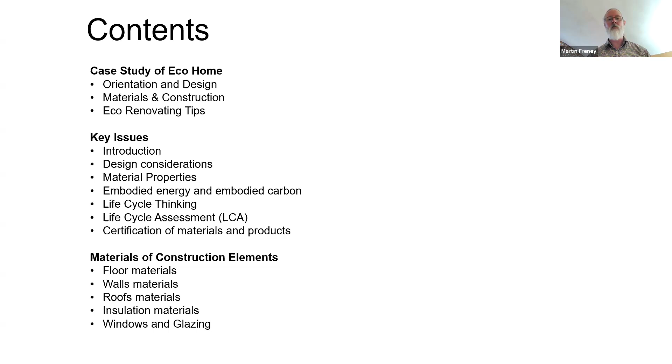So let me start by talking a little bit about design. What will we build and how will we build it? It all starts, of course, with the design team, which is generally you, the homeowner, working with designers or architects. Also engineers often get involved. These are all the people who are making really important decisions about design, and as part of that is, of course, the materials that are used to bring the design to life.

And we're going to comply with the National Construction Code. But I want to just point out that the construction code sets a minimum standard. And so I'm always trying to exceed the minimum standard where possible, with budget and other constraints like that. So at this design stage, materials and costs are locked in. And so this is just such a critical stage. It really sets the tone for the whole project.

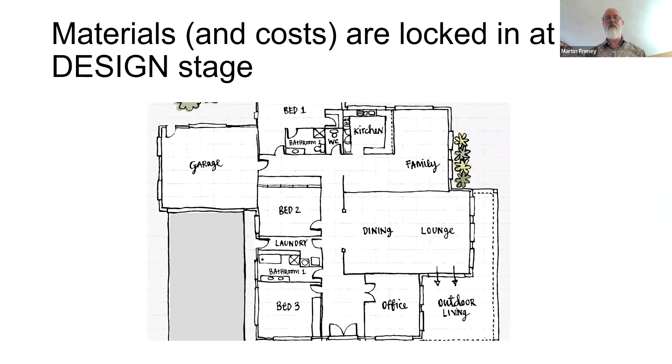And over the life of that home, that is going to be a really big deal, whether it's a comfortable home to live in or not. And running costs and all that kind of thing are going to be baked in at that design stage.

So one of the main considerations I want everyone to consider is the size of their home. This determines how much or how many materials are needed and have to be paid for by the owner, assembled by the builder, and then maintained by the owner. So if you can build small, that is a good thing.

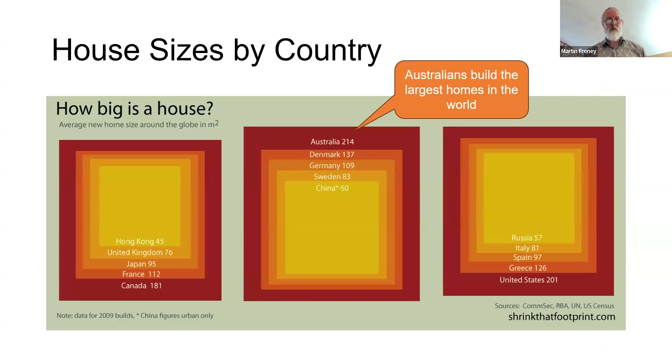And the problem with that is that big houses need more energy to heat and cool. And as I've also just explained, they need more materials. So that has a greater impact on the environment and your hip pocket.

So I'd like to now look at a case study of a home that was completed a couple of years ago now. All the work I do is inspired by the Earthship concept, which is trying to be super sustainable. It uses passive solar design and self-sufficient off-grid systems to make the building autonomous or self-sufficient. The idea there being that you don't have utility bills, and also it's minimizing the impact on the environment.

So what I'm about to show you is of a modest size. It's about 130 meters squared, 2-bedroom, 1 bath on a suburban block of land, reasonably good size, 900 square meters, and it cost about $400,000, which included batteries, panels, rainwater tanks, grey water system, and it was built by an owner builder. It's called Earthship Gulwa.

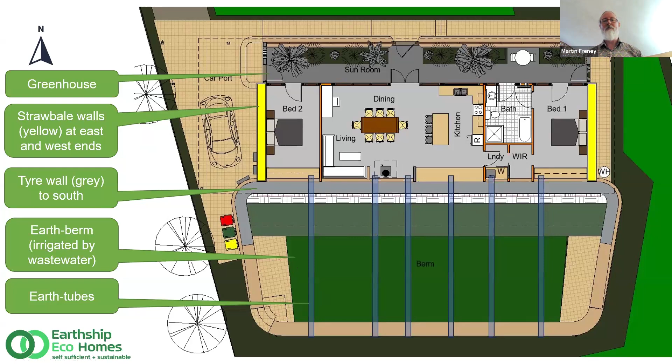So we call that a convection current, or it's sort of like a thermosiphon kind of thing where hot air rises and pulls the air in without needing fans or anything.

The other interesting thing about having a sunroom on the north side of the building is it creates a buffer zone, so that isolates the living spaces from extreme outdoor temperatures. And then the earth berm is also a buffer zone. The highly insulated roof is a buffer zone. So you can see that those living spaces are really isolated from what's going on outside.

So that's the concept. This is a shot taken with my smartphone using an app called Sun Seeker. Shows you the path of the sun. So this is also a really useful design tool.

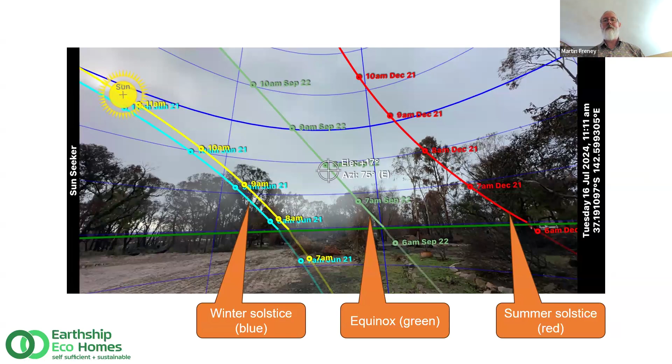I think when you're starting to think about a block of land, you can start to evaluate where the sun is and whether it's going to be blocked by other buildings or trees. So, yeah, this is one of the things that your designer will do is look at where the summer equinox and winter solstice sun will come into the building. And of course, that all works a lot better if the building's facing north.

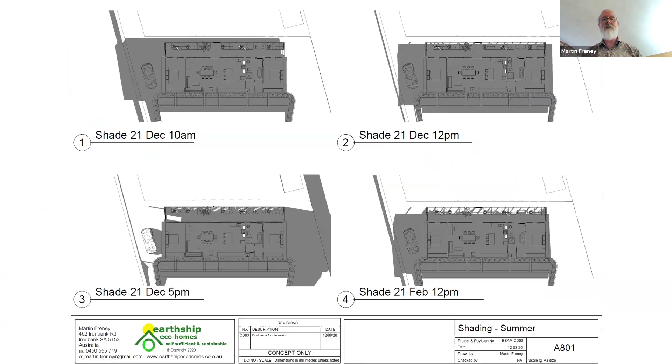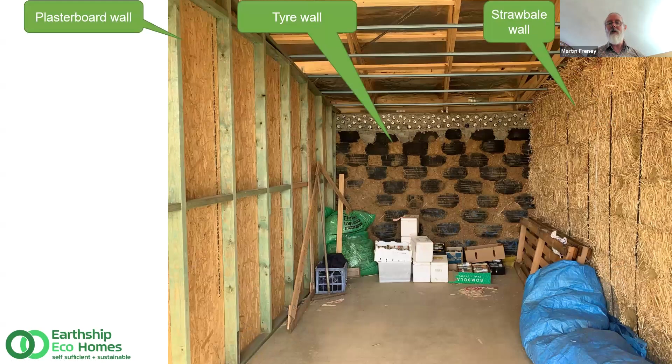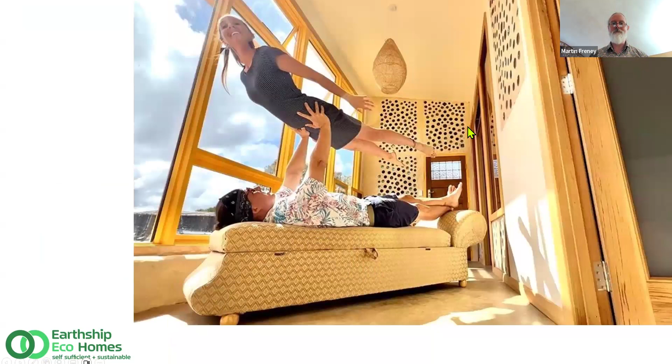The other thing we do with earthships is we upcycle bottles into colourful bricks, which you'll see in that photo as well. So there's some YouTube clips if you want to do more research on that.

There's another earthship project in Victoria. I just thought I'd throw in a floor plan and photo of it under construction, because this is in Victoria, where you're listening from tonight.

All right, so moving on from the case study, I just want to share a few retrofit ideas before I do a bit of a dive into all these material properties and what makes a material ecological or sustainable. So the first thing to note is that upgrading a poorly performing home can be a very sustainable thing to do rather than knocking it over and starting again.

Some of the low-hanging fruit, the easy things to do, are things like draft sealing, as you can see in this photo. For probably under $100, you can dramatically improve the thermal efficiency of your home just by stopping the drafts.

Adding ceiling insulation is another obvious one. Double glazing, or there's a product called magnetite, where another pane of glass or perspex magnets onto a frame to turn a single glazed window into a double glazed window. Ceiling fans are a great idea, and things like solar panels are also really good, especially when used to power air conditioning.

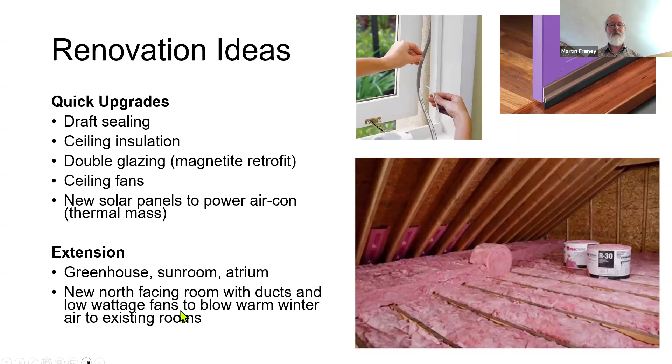A more substantial upgrade might be an extension to the house - so a greenhouse, sunroom, or atrium, as I've just shown you with that Earthship example. I think they're a fantastic idea, just capturing that free energy from the sun, and then perhaps using some ducts and low wattage fans to blow warm winter air into existing rooms.

So here's a few examples of some beautiful sunrooms. This again is one of my designs from the Narara Eco Village in New South Wales. That greenhouse on the north side also provides some other functions like laundry and garden area.

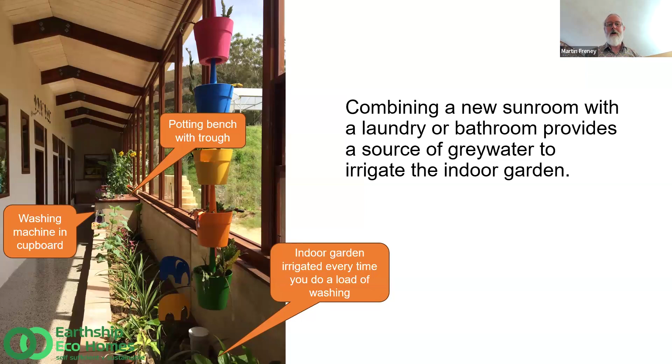Another thing I think is worth mentioning really quickly is some sustainable products. We're sort of in this grey area of products and materials. I'm going to talk a lot about windows later, which arguably are a product, but I just thought I'd quickly mention that.

Composting toilets I feel are really an excellent sustainable choice. Solar hot water services or heat pump hot water services are going to save you a lot of money and electricity or gas, so they're good for the environment and your hip pocket. Solar panels and batteries, same - they save the environment and your hip pocket, and also grey water systems are going to help you save water. The tip here is that if you can think about this at the design stage and not do them as add-ons and integrate them into the design, that's going to work better.

So just a couple of photos of some composting toilets. There's basically two main types - one that goes under the floor on the left, and then the one on the right is much easier to retrofit in because it just sits on the floor. You don't need an underfloor space.

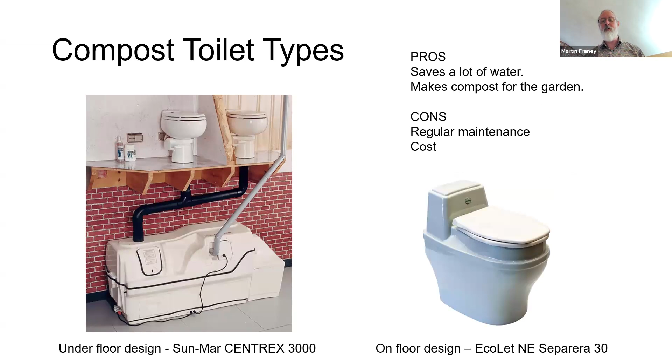As I said, it saves you a lot of water. It also makes compost for the garden. The downside is the maintenance and the cost of these things, but I'm a huge advocate of these. I have one myself and I love it. My kids love it. So yeah, I think they're great.

Or the other really energy efficient option is the heat pump. They come in a split system or a combined unit, and these are very popular these days, saving people a lot of money and reducing pollution.

So on to sustainable material properties. What makes a material sustainable? When choosing materials, there's quite a few things that need to be on your mind. Energy issues - I've sort of been talking about this already. We talk about embodied energy, which is the energy used to make the material, and also the operational energy, which is the heating and cooling energy of the home. That all stems from these material choices. Insulative value, for example, is important - I'll go into that in some more detail in a minute.

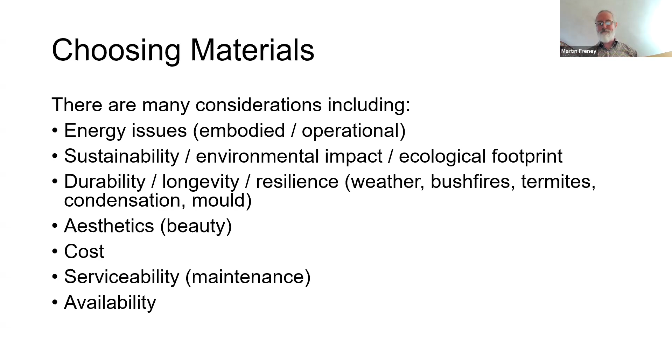The sustainability, environmental impact or ecological footprint is closely related to that first one. The durability, longevity, resilience against things like bushfires, extreme weather, termites, condensation and mold is important too. Aesthetics and beauty, which is of course subjective - you've got to ask yourself what do you find beautiful to look at. Cost, maintenance, and availability are all factors.

What are we trying to do here? We're trying to reduce the eco impacts of manufacture, make the home more energy efficient. We're trying to make sure that the people building your home are not going to be poisoned, and likewise when you're living in the home there's not going to be toxic off-gassing. It's got to be not too expensive and not require a lot of maintenance, and also not cause problems during demolition. This is one that often gets overlooked - people aren't able to think that far ahead.

Let's look at thermal performance - this is the heating and cooling energy, and it's a big deal. It's going to be the biggest cost of running your home, how much it costs to heat and cool it. It's possible to get this right down to pretty much zero with good design. Insulation and thermal mass are the two types of materials that designers use to try to keep that heating and cooling energy down and naturally create this beautiful indoor temperature.

What you see on the right here is a screenshot from yourhome.gov.au - there's a link there, just Google 'your home' and this should come up. There's a heading, passive design, and it talks about design for climate, with lots of good advice about how to actually design for your climate.

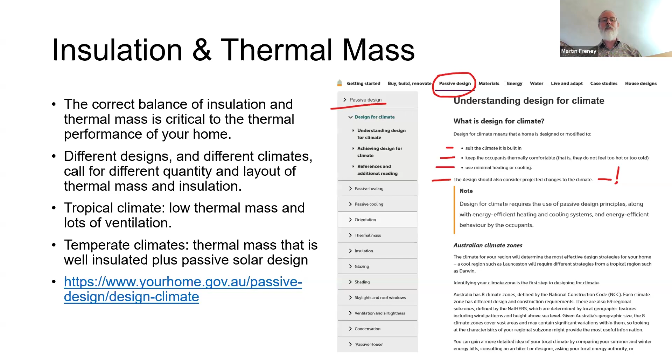What's the right amount of insulation and thermal mass? For example, in the tropics you're probably not going to want a lot of thermal mass because that just holds onto the heat and keeps it warm overnight when you don't want it to be - lots of ventilation is the key in the tropics. Whereas in temperate climates, thermal mass that's well insulated plus passive solar design is going to lead to a very energy efficient home.

So let's talk about insulation. Insulation slows down the flow of heat energy. Keep in mind that heat flows from hot places to cold places, and it's measured with R value and U value.

So there's lots of types of insulation. We've got the batt insulation we were just looking at, which comes in batts or rolls. That's a blanket, typically used for roofs, sometimes it's got the shiny foil on one side.

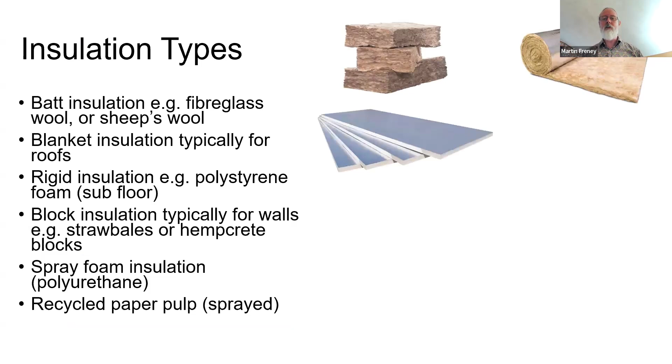Rigid insulation, polystyrene, is often used under a floor. Block insulation—we've already talked about straw bales, but here you also see some hempcrete blocks. And then there's spray foam insulation and recycled paper pulp, which I think is also an excellent sustainable choice because we're using recycled paper.

So, R values. This table shows various insulative products and different thicknesses of those products, and the resulting R value. One thing to notice is where we've got double the thickness, 50 mil versus 25 mil—if we pick this first one, 0.71, and double that, you get 1.42. So double the thickness gives you double the R value.

Another important thing to understand is if you do 1 divided by the R value, you'll get the U value, and vice versa. So it's just the inverse of each other.

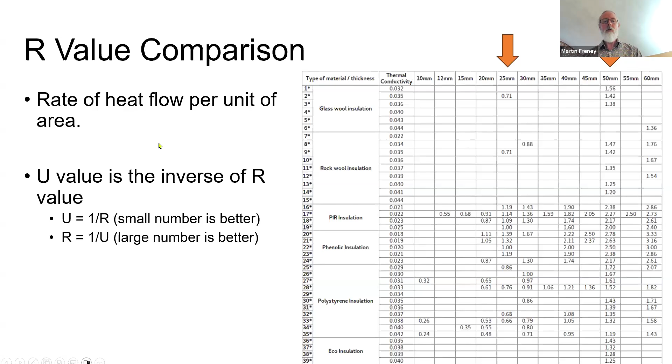Another thing to keep in mind when you're hunting around on the internet is that the units used in America are about 5.7 times larger. So it gets quite confusing when you're looking at American websites.

Another really important thing about insulation is how it gets installed. This applies more so to those batts—no gaps is really important, and also not crushing it, because if that insulation batt is crushed, there's not as much air in it, and it's the trapped air that helps stop that heat flow moving as quickly. That could be an advantage of things like blown-in recycled paper, cellulose, or spray foam, although I don't love spray foam because of the toxic chemicals.

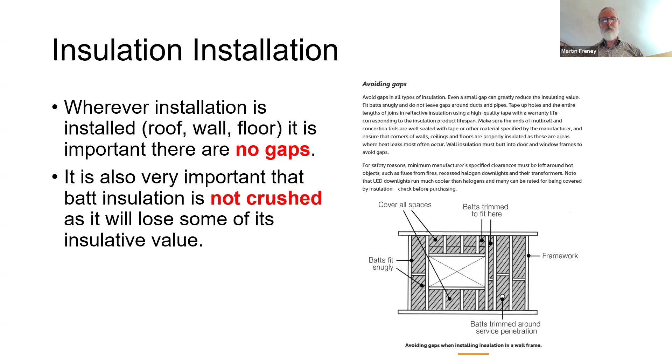So again, I refer you back to Your Home, where you can find some key points about insulation.

Now I want to talk about thermal mass. Thermal mass acts like a battery to absorb, store, and release heat, usually at nighttime when the sun's gone down and you want some extra heat. It helps regulate indoor temperature by what they call a thermal flywheel effect.

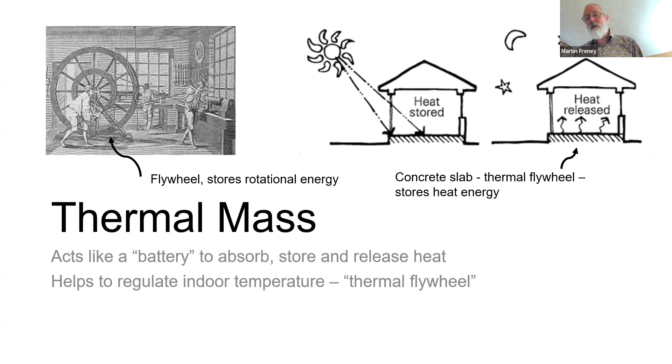So here is an actual flywheel that stores rotational energy. It's a big wheel that once you get it going, it just wants to keep spinning, and here it's being used to drive an ancient lathe for wood turning. It's a similar kind of concept, this thermal flywheel, which stores heat energy.

This concrete slab in this example stores energy from the sun during the daytime, and then at nighttime that heat gets released and helps improve the indoor temperature without active heating.

There's all sorts of types of thermal mass. Concrete is probably the one we're most familiar with, but fired clay bricks are thermal mass, mud bricks, rammed earth, and even water is thermal mass. It's dense materials, whereas insulation is like light, fluffy, airy materials.

This is a photo of the building I'm standing in right now—this is my earthship project. Here you can see a floor made out of earth, which is soaking up the sun and storing that energy until nighttime.

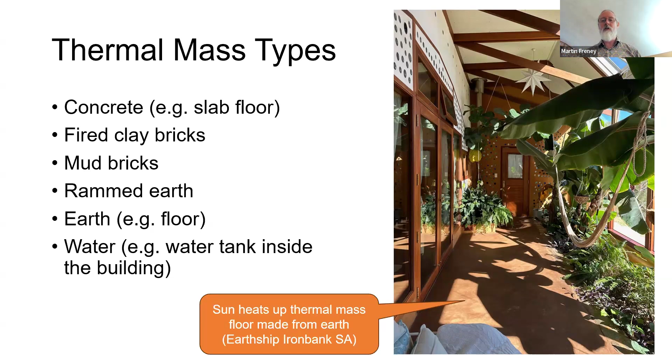Again, back to the Your Home website, there's lots of good information about thermal mass there as well. What works really well is insulated thermal mass in a temperate climate.

This cross-section shows a reverse brick veneer wall, which is where instead of putting the bricks on the outside of the building, we pop them on the inside. Now we've got insulation to the outside, which is stopping that heat flow through the bricks and into the outside air. So just by swapping those two materials around, we get dramatically different results for heating and cooling energy. This is a really obvious and simple way, using commonly available materials, to improve the performance of a home.

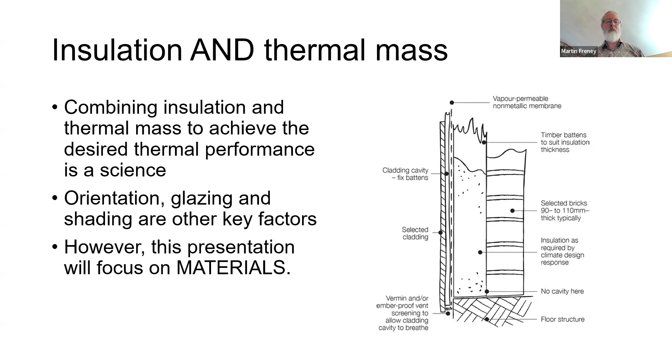So let me move on now to eco impacts of materials and how to reduce your eco footprint throughout the whole life cycle, from manufacture to end of life. It's really important to think about this idea of a life cycle of a home.

As I said before, we've figured out how to make buildings more energy efficient, reducing the operational energy—the heating and cooling energy. The next big challenge for all the designers out there, and for you, is to figure out how to reduce the embodied energy of the construction materials and improve end-of-life outcomes, hopefully recycling instead of demolishing things and sending it all off to the landfill.

This is known as a circular economy—this idea of upcycling materials in continuous loops. So instead of sending things to the dump, they get used again and again.

And that leads into this idea of life cycle thinking. I've listed the four main stages: raw materials getting turned into building products through a manufacturing process, then getting used during the occupancy stage of the building. And then ultimately, every building is going to get knocked over one day, so we need to think about that as well.

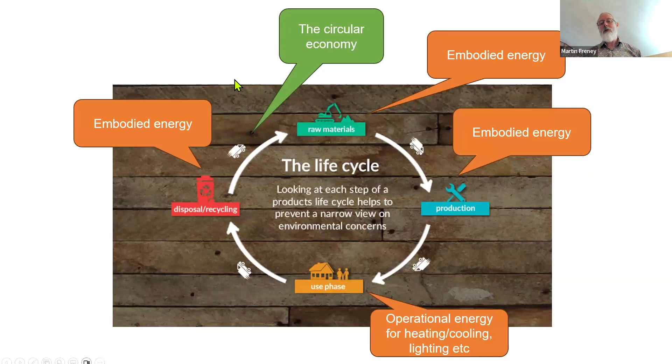Here's a little diagram that shows those four stages. The first two are characterized by a lot of embodied energy. The use phase is all about reducing the operational energy. And in that final stage, there's also embodied energy with carting all this stuff off to the dump or processing it. The circular economy is where it all just goes around nicely in a circle, and we're not having to do as much mining or forestry to get the materials we need to build our homes. And yes, there's also transport energy - you can see a little truck whizzing around, lots and lots of energy moving materials around.

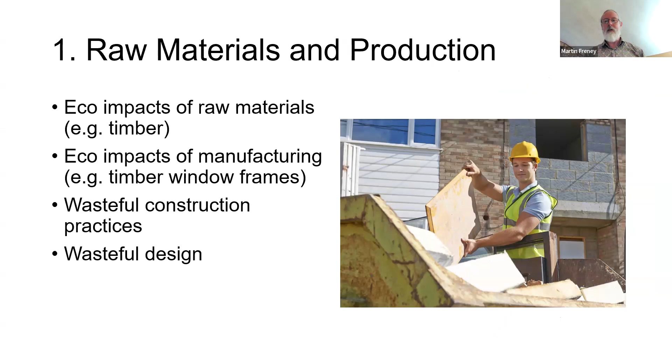So number one, what can we do to reduce the eco impacts? Basically, there can be a lot of waste in our construction practices, so that's one thing. I'm going to go through a case study which explains this in some detail. Number two, I'll just give you a quick overview here.

This is running costs: electricity, gas, water, sewage, and maintenance. Three, end of life - yeah, this is not a good result here, just knocking things down and making a whole bunch of rubble.

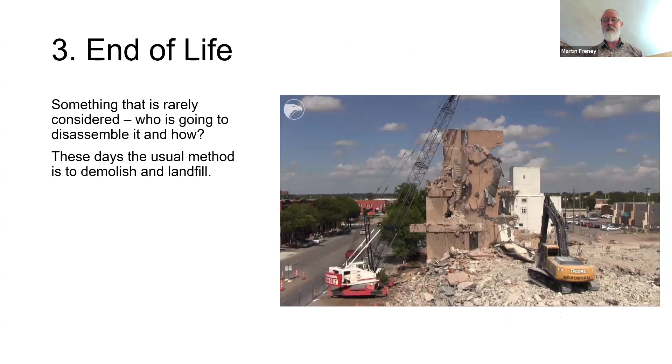So let's look at a case study of the life cycle of timber. I want you to, after this presentation, think about some other material and see if you think you can imagine how all these things are made. But obviously, I suppose with timber, it starts with a tree.

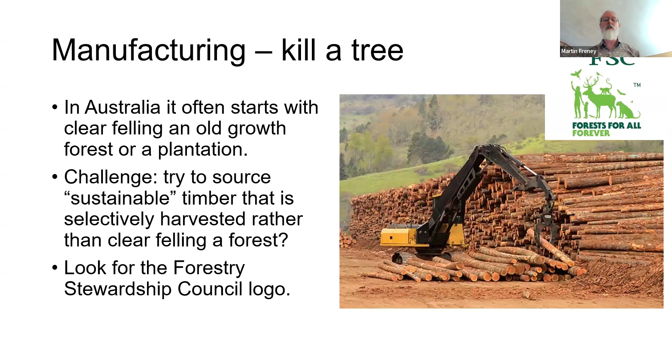And we kind of need all these things to get the tree to grow, and then we have to harvest the tree. It can be a real challenge to actually find sustainable timber that's harvested in a way that's not just clear felling forests, especially our old growth forests. So look for this Forestry Stewardship Council logo, and that's a good indication that more sustainable practices are being used rather than clear felling old growth forests.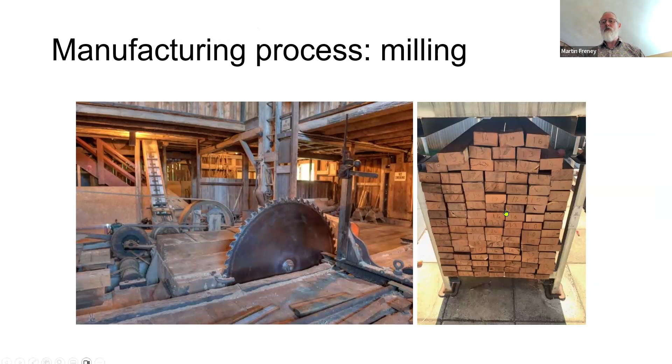It's got to be kiln dried, which is super energy intensive. Perhaps a more ecological way is just using air, but then the downside there would be it takes longer. And another ecological idea that again maybe speeds things up a little bit, but not as fast as the kiln drying and not as readily available.

There's also even energy used while it's just sitting in the warehouse, and of course the materials, the transport emissions to get it to your site. Although if you look carefully, this is a 100% electric truck, so help is on the way.

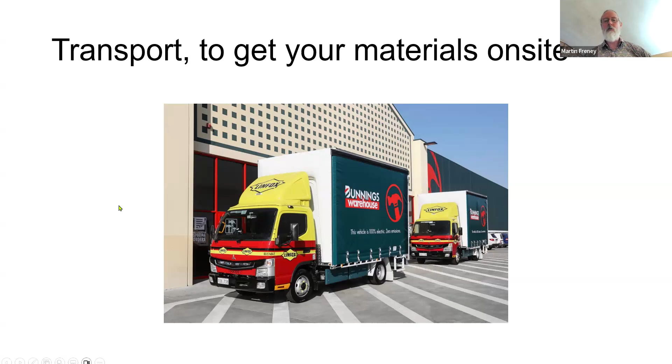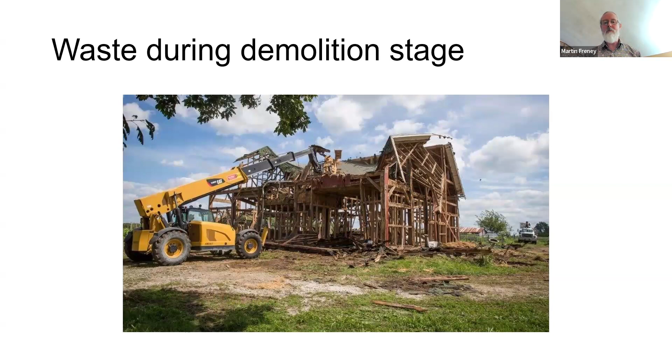And at the building's end of life, what happens to all that timber? Is it going to get put in the landfill, where it could potentially create methane emissions, which is terrible for global warming, and incineration is not much better. So perhaps a better way is, can we design timber buildings?

Here you see a beautiful timber building that is actually designed for disassembly and reuse in another building. So this is kind of the future.

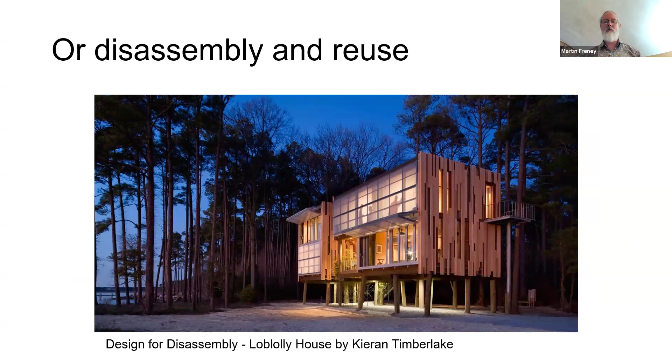So in summary, throughout the life cycle of timber-based materials, there are lots of opportunities where we can make better outcomes. And it's by considering all these life cycle stages, looking for FSC certified products, avoiding waste on site, specifying eco-finishing and maintenance products, and designing for disassembly, that this can all lead to much better outcomes when we're talking about timber.

And so, of course, I don't have time tonight to go through a whole lot of other life cycles of other materials, but your homework is to just put your thinking cap on and think, well, how is something produced, and what might happen to it at end of life?

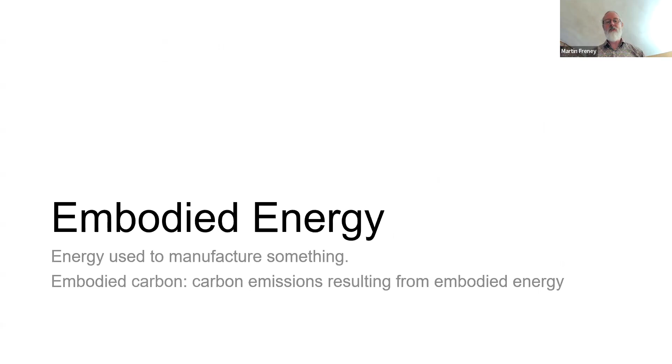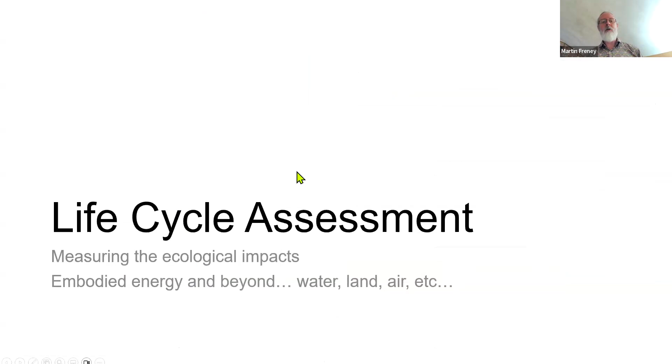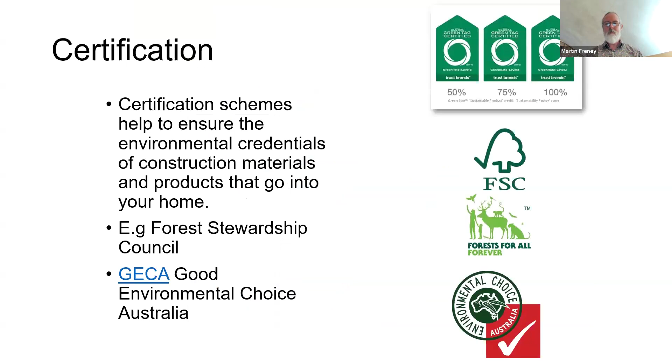This now gets used for certifying products. You can see here at the heart of the Global Green Tag rating system, life cycle assessment is used to evaluate how green a product or material is. You can do a search - I searched for insulation, and it provides examples of products that have gone through this system and been shown to be more green than comparable products. There are a few certification labels.

So, Martin, yeah. G'day, Martin. I've got a couple of questions, if you don't mind. Maybe I'll just throw a few in now, if that's okay.

The first question is, are all double glazed windows still imported, and if so from which countries, and are they transported by air? Do you know much about double glazed - I'm guessing that means the glazing units, because people make double glazed windows locally, the actual window frames, but are the double glazed units that go into those windows imported? I'm pretty sure we have a local manufacturer - Viridian, I believe, is an Australian manufacturer, they get made locally, but I'm not 100% sure. I have got some slides coming up on double glazing.

Great, thank you. Any other questions? Yeah, one more. Is there any progress with testing of houses for energy efficiency before completion certificate?

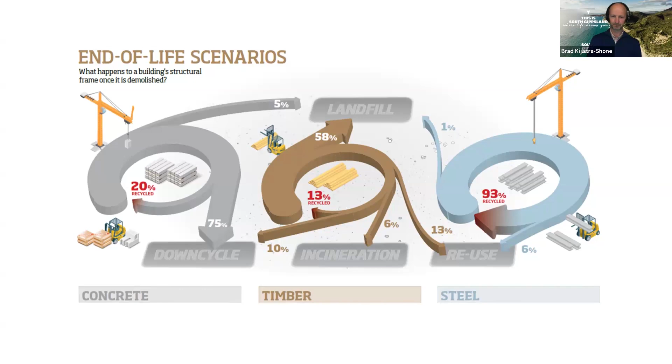Yeah, I think it's a great question, and I would love to see more testing of as-built homes. At the moment the system we have is that you get your energy assessment done at the design stage to show the house is predicted to meet the minimum 6 or 7-star rating. But that's a prediction using software and a lot of assumptions. Another confounding factor is how one family might use the home versus another - one family might be really good at opening and closing windows, turning off lights and heaters, whereas another family might be terrible at that. So there are all sorts of problems here that are somewhat hard to solve, but I'd love to see a lot more going back and testing.

You mentioned the air leakage blower door tests - that's increasingly common. During the construction stage, they'll do the blower door test to make sure the building's been sealed adequately. So things like that are steps in the right direction, but very few.

I kind of feel it's on the designers and architects of this world, but maybe the homeowners too, to demand this monitoring. This was a huge part of my PhD, putting sensors in homes to actually see how they perform. That's absolutely fascinating. I've got an app on my phone so I can monitor the performance of this earthship building I'm in now. Every half an hour it takes another reading and makes all these beautiful graphs, and you can start to understand how energy efficient a building is. So let's have more of that in the future, but it's not mandatory at this stage.

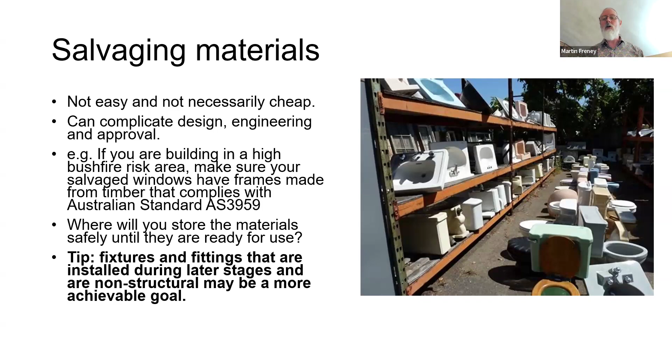So salvaging materials can be a good idea. It can also make design and engineering a bit tricky, because now the designer has to work with a whole lot of given dimensions rather than just specifying whatever suits. My tip here is maybe go for things like sinks, toilets and fixtures that aren't quite so critical, and are also easy to store. Whereas huge piles of timber or something with nails in them, there can be a whole lot of extra complexity to working with recycled salvage materials.

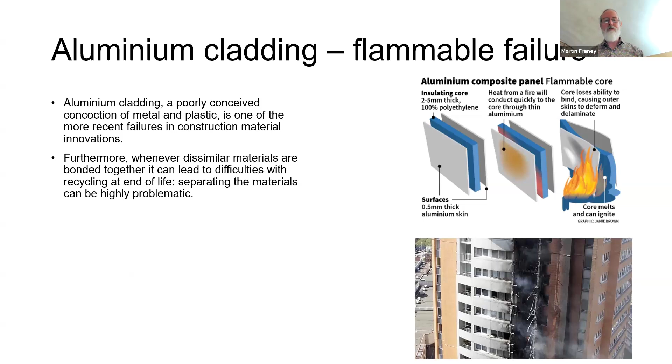So, toxicity and safety. This is a blast from the past, but I'm putting it out there that we've got to always be aware of this toxicity issue. The latest one was aluminium cladding, which caused some really horrific disasters. And the very latest is engineered stone, which is causing horrible illnesses in the people that work with this stuff. So toxic materials are a thing we've got to always be vigilant about looking out for.

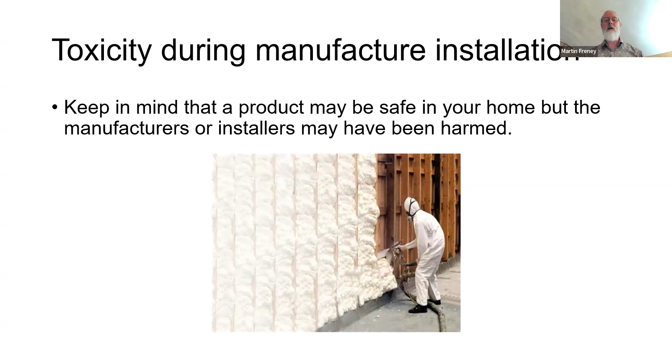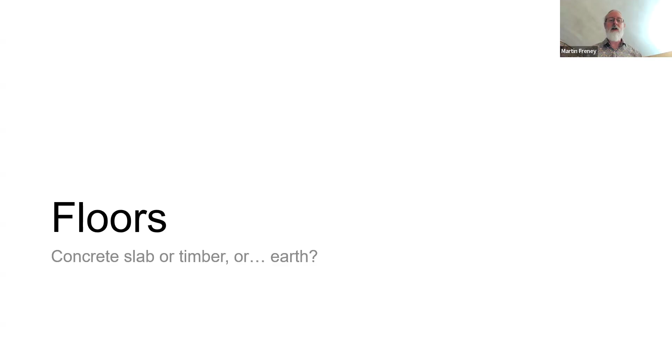All right, so moving on to construction elements. Let's look at the main parts of a typical house. Floors, we'll start with. Basically the two main options are concrete slab or timber, or as I've already pointed out, I used earth.

Concrete, as I already indicated with that little calculation about how much energy goes into making a concrete slab - oh, I forgot to say that in that calculation it was about 2.5 years of energy use running a typical home. Running that home for 2.5 years would be the amount of energy that went into making the slab. So it's a huge amount of embodied energy in that slab.

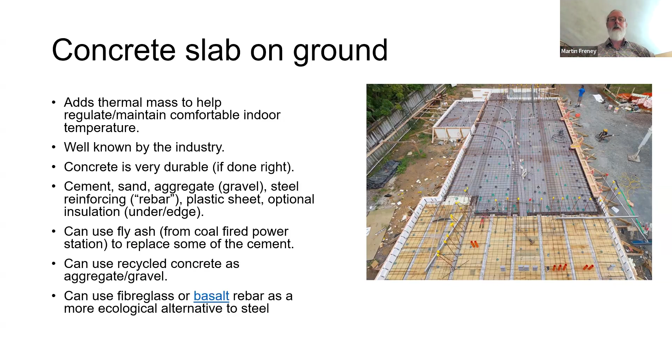There are some techniques like using waste products like fly ash to replace some of the cement. The cement is actually the really high embodied energy material. We can use recycled concrete, recycled aggregate and gravel instead of new gravel. And also there's a recent innovation where you can use basalt rebar instead of steel rebar. So there's interesting things going on in the concrete world - these eco-concretes.

Back on the concrete slab, putting heating in the slab can be a very energy efficient way of keeping the temperature in the room nice, because the floor is warm and the hot air rises. So that's an interesting idea. You can do that with water pipes or just with a resistive heating element. And of course the slab can be clad with wood, which I don't love because it tends to override the thermal mass properties of the slab. That thermal mass slab can be great, as I explained earlier, using that thermal flywheel effect. And I think it's really beautiful when it gets polished, it can just look amazing.

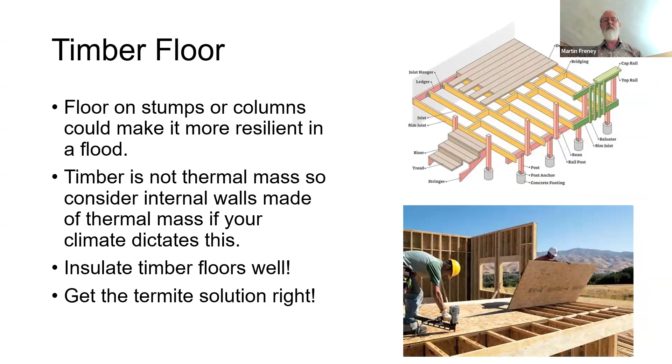Timber floors is the other obvious alternative. You've got to get your insulation right on the underside of these and make sure your termite solution is good. But yeah, timber is a very beautiful and renewable material. We can grow more timber, but of course looking at those forestry practices is super important. And also with climate change it's going to get harder and harder here in Australia to grow timber. So look out for that Forest Stewardship Council logo.

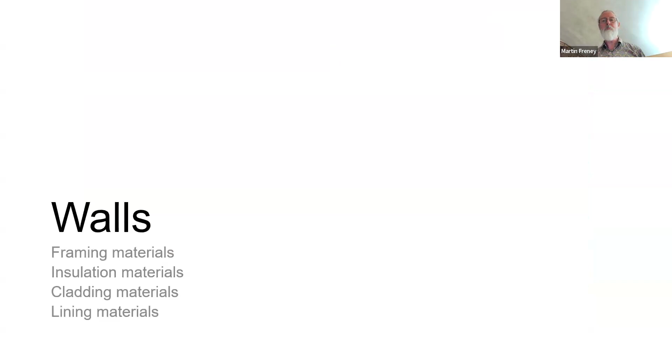All right, so onto walls.

Steel versus timber, the jury's out on which is more sustainable. If you go to the steel website, they'll say they're more sustainable than timber, and vice versa. Steel framing is lightweight compared to heavier timber, but the embodied energy of steel is massive from all the mining and high temperature processes needed to make it. So I think on that one, don't worry too much about it. Talk to your builder about what they prefer to work with.

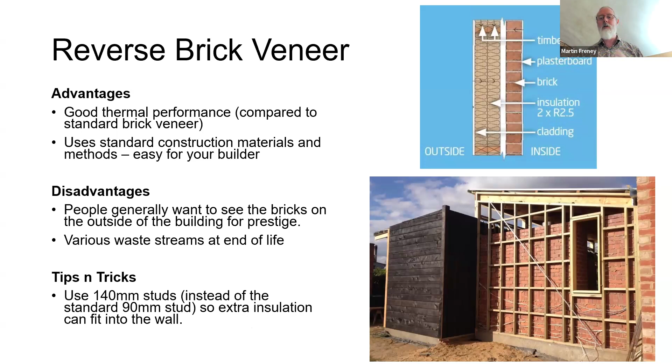I've already talked about reverse brick veneer, so I won't go on about that. Maybe one little tip: instead of 90 mil studs, use 140 mil, then you can get some extra insulation in there. That really applies to any stud wall. It just seems like a great idea to me, getting some extra insulation in there.

Straw bale, I've already talked about a fair bit. It's just such amazing insulation, the walls are so thick, and these quite dense straw bales lead to very good insulation. Typically they get earth rendered, and it's the kind of thing you can actually do yourself.

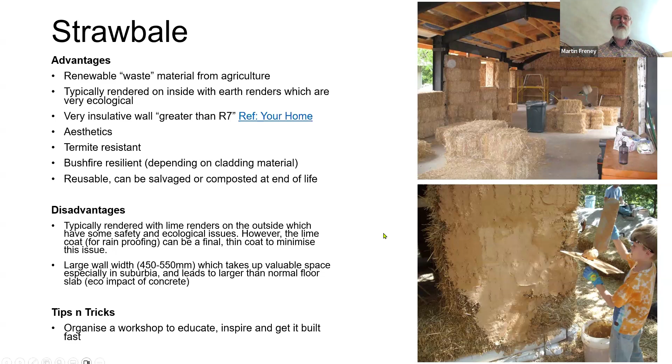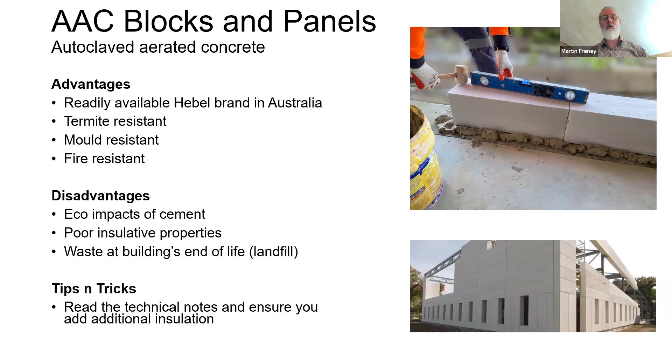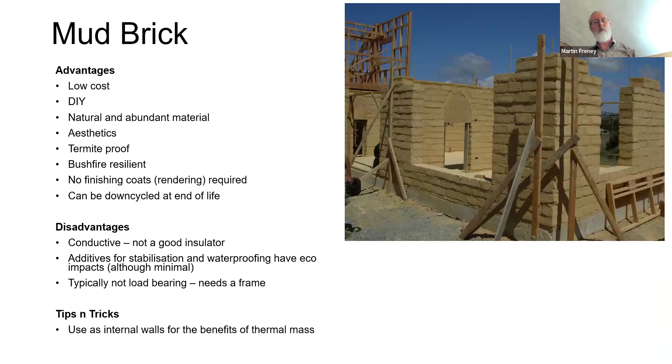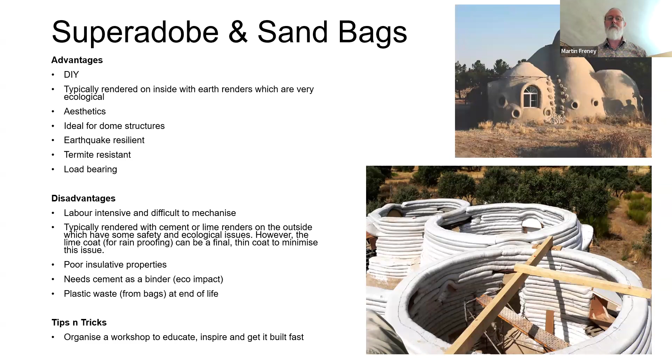My favorite, being an earthship fanatic, is using car tires, which of course uses up waste materials - we fill those tires with earth to make a big eco brick. A similar concept is, instead of filling tires, filling polypropylene bags. That's Superadobe sandbags. So yeah, all sorts of walling options there.

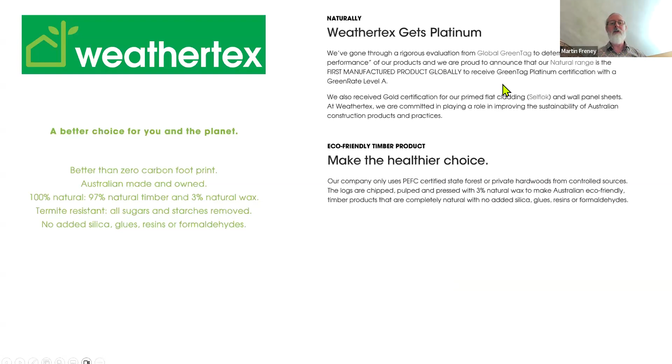So what about sheet materials to line your walls or to clad your walls? WeatherTex is a pretty sustainable one, using waste wood fiber. They've done some life cycle assessment and Global GreenTag certification to prove how sustainable it is.

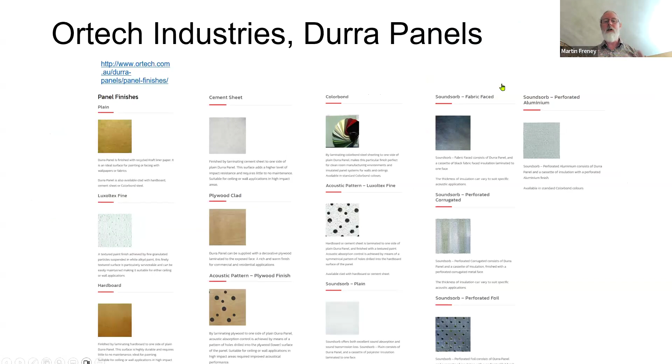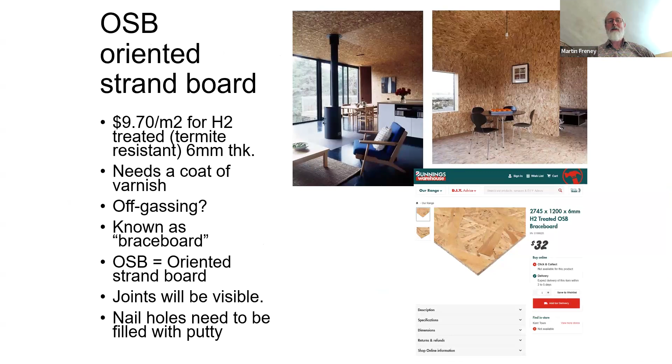Solomit straw board ceilings - again, insulative straw. Salvage floorboards, oriented strand board or OSB - this is essentially a waste material, little wood chips that get glued together.

A more upmarket version of that is plywood. Again, looking for the Forest Stewardship Council logo would be important.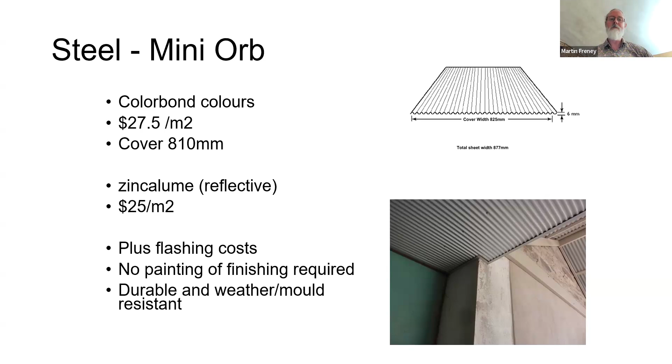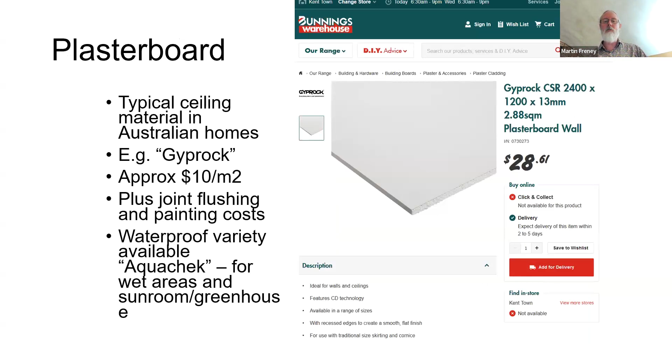Steel cladding or lining can be very durable, lasts a long time. But as I've mentioned already, there are some pretty heavy eco impacts from manufacturing steel, though it is recyclable. So many pros and cons, and I'm sorry to say there's no really clear answer unless you really go down the rabbit hole with paying someone to do a life cycle assessment.

Plasterboard - we all know about plasterboard. Roofing: sarking membranes and wraps, that's the fabric that goes under your roof cladding. It's an important part of getting a well-sealed roof, and can be important in bushfire zones as well.

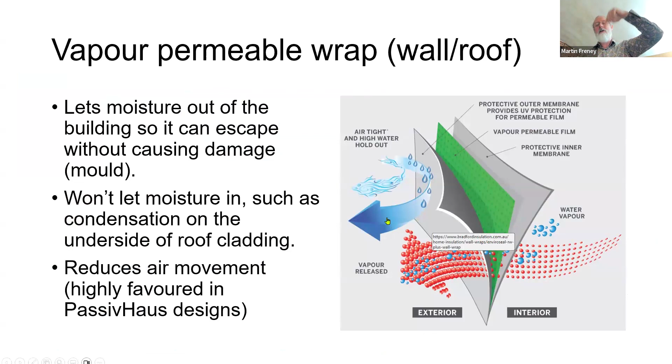The latest, greatest versions of these are vapor permeable, so that water vapor from the house can pass through, condense on the underside of the roof, and then when it drips down, it doesn't go through the sarking. So it's sort of like a one-way street for the water vapor.

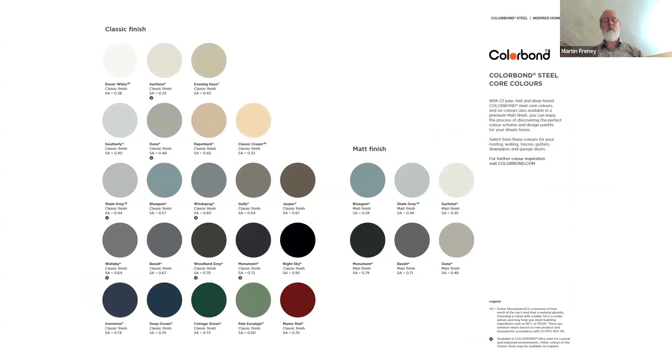Important thing to know about roof color is the solar absorbance, the SA number - if you get a low number, that gives you a better performing roof, because darker colors absorb more heat and are therefore less energy efficient. So go for the lighter colors there.

Roof framing is similar to the wall framing conundrum - there's no clear winner with steel versus timber.

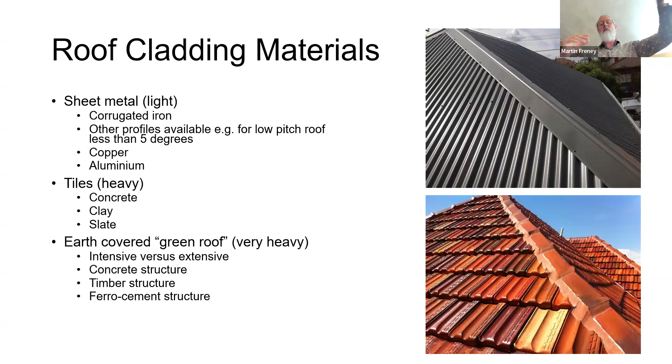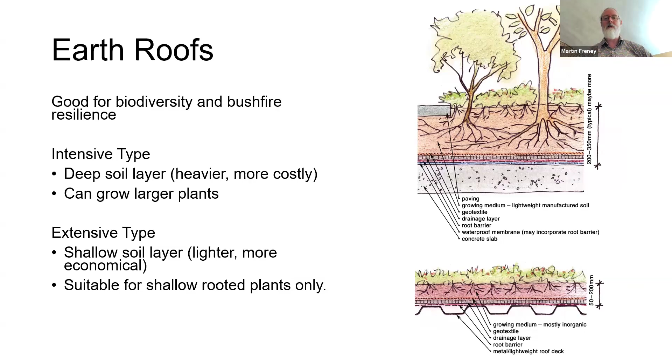Now, windows and glazing. The most important thing here is orientation. I'm not going to talk too much about that - basically, facing north is best.

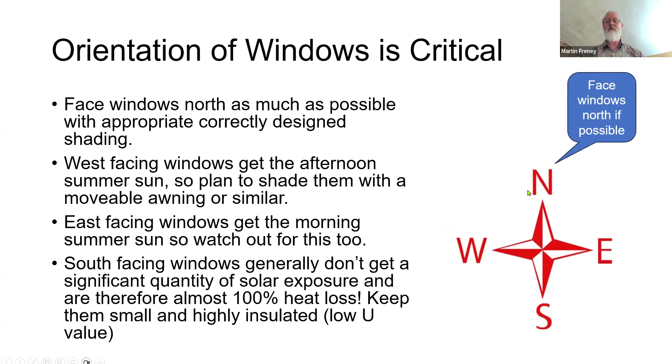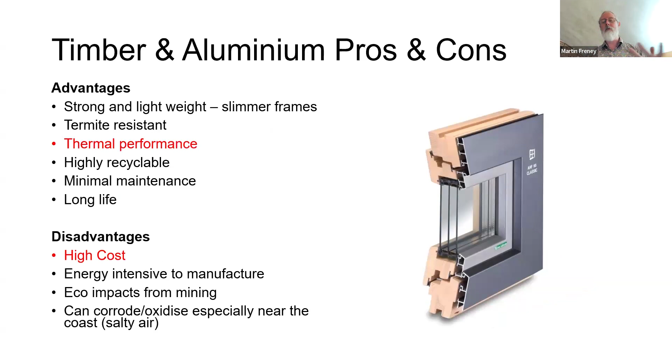Frames are a big deal. Aluminium - the problem with that is it can cause condensation because it gets cold, it's a conductive material. So a well-designed aluminium frame will have some sort of plastic barrier inside the extrusion to stop that heat flow. Perhaps the ultimate window frame is aluminium on the outside to reduce maintenance and timber on the inside to reduce heat conduction and look beautiful. But of course, you pay for it.

Plastic framing is great for thermal performance because plastic is an insulative material, but there's always a downside. These are things you just have to tell your designer your preferences on. It also comes down to budget.

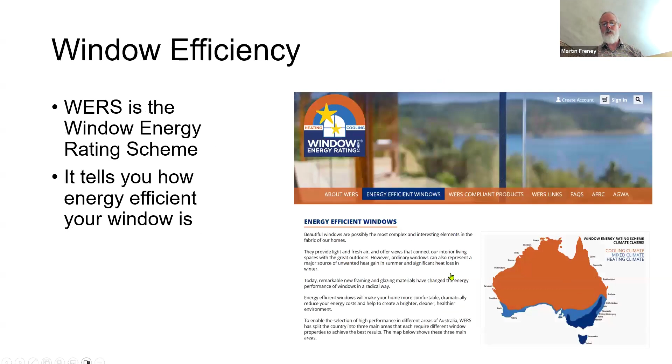I love working with timber windows, but you've got to maintain those things, which not everyone wants to do. There's the magnetite retrofit I talked about earlier, adding an extra pane of glass. You should be aware of the WERS scheme, the window energy rating scheme.

There was the question earlier about insulated glazed units or double glazed units. They've got a website where you can find out how energy efficient a given window is. Pretty sure we do make them in Australia.

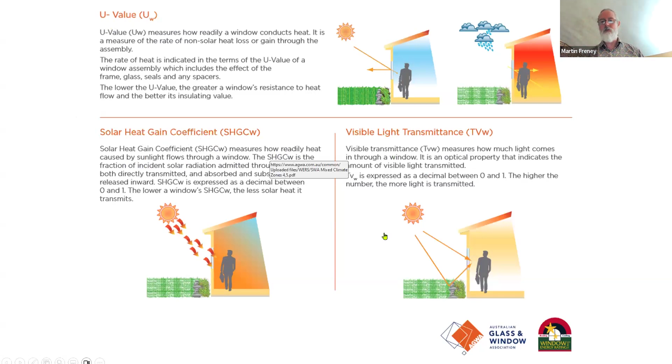Here are the key metrics of how a window and window frame system is measured: the U value - remember the inverse of that is the R value - the solar heat gain coefficient, how readily heat caused by sunlight flows through a window, and visible transmittance, how much light actually comes through. A reminder about U value and R value - if you can get below 0.2, that's pretty phenomenal, R5 or a U value of 0.2.

Note that single glazed is basically R 0.2. So single glazing is pretty shocking stuff - it's almost like there's just a big hole in your wall. It's not doing a lot.

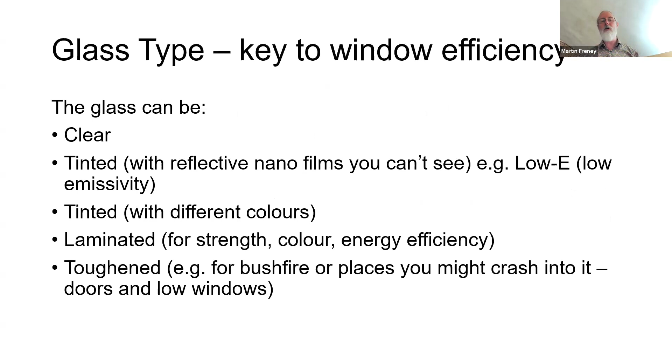Also, there are all sorts of different glass types - it can be clear or tinted, laminated, toughened for bushfires. You really need to talk to your designer about all these options and what makes sense on a given window. West-facing windows, for example, should probably be tinted to help reduce that afternoon, winter, summer sun from causing big problems.

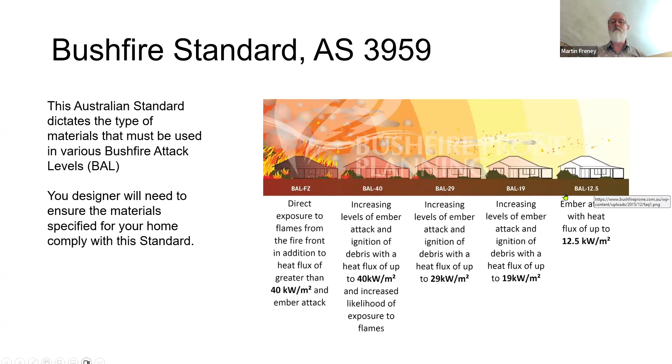Quick note about the bushfire standard. Your designer will first find out your bushfire attack level, then understand what types of materials and systems are needed to ensure the building has the greatest chance of surviving a bushfire. Unfortunately, the Australian standards are hidden behind a paywall, but some websites have good summaries. A tip - the Australian Glass and Window Association has a good summary of that.

So this is the end, folks. In conclusion, there is no perfect solution for all sites and all people - it's context specific to climate and budget, etc. Having a conversation with your designer or architect about what types of materials you like and your philosophy on environmentalism will help you be happy with the choices you make. Your designer will develop a range of options for you to choose from, and hopefully this presentation has helped you understand how to make some choices that reduce the cost of your home and make it more ecologically friendly.